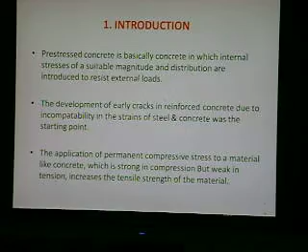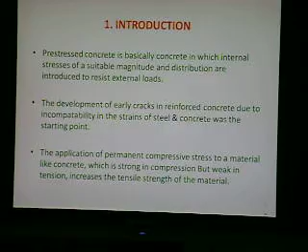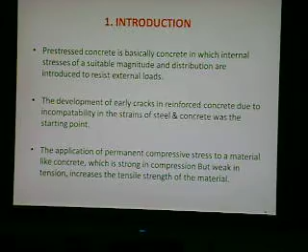Pre-stressed concrete is basically concrete in which internal stresses of a suitable magnitude and distribution are introduced to resist external loads. The development of early cracks in reinforced concrete due to incompatibility in the strains of steel and concrete was the starting point. The application of permanent compressive stress to a material like concrete, which is strong in compression but weak in tension, increases the tensile strength of the material.

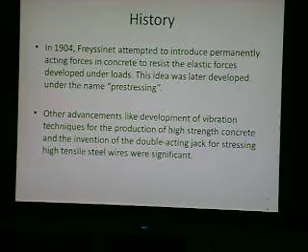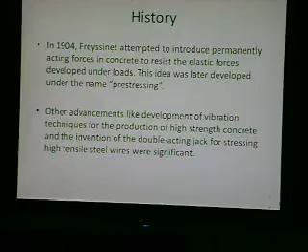In 1904, Freyssinet attempted to introduce permanently acting forces in concrete to resist the elastic forces developed under loads. The idea was later developed under the name pre-stressing. Other advancements like development of vibration techniques for the production of high-strength concrete and the invention of double-acting jack for stressing high-tensile steel wires were significant.

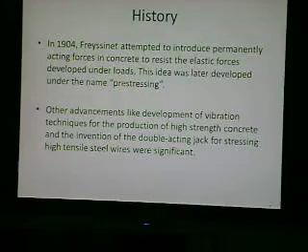Some important terms. Tendons: a stretched element used in a concrete member or structure to impart pre-stress to the concrete. Generally, high tensile steel wires, bars, cables or strands are used as tendons. Anchorage: a device generally used to enable the tendon to impart and maintain pre-stress in the concrete.

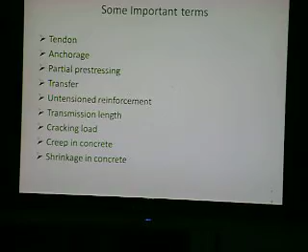Partial pre-stressing: the degree of pre-stress applied to the concrete in which tensile stresses to a limited degree are permitted in concrete under working loads. Transfer: this stage corresponds to the transfer of pre-stress to concrete. For post-tension members, it takes place after the completion of the tensioning process.

Supplementary or untensioned reinforcement is the reinforcement in pre-stressed members not tensioned with respect to the surrounding concrete before the application of loads. These are generally used in partially stressed members.

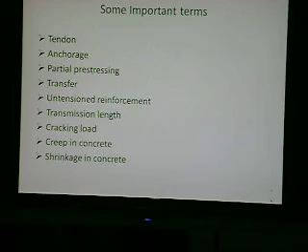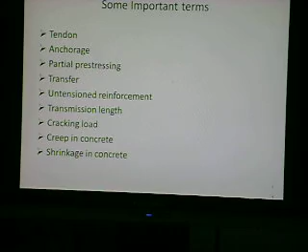Transmission length is the length of bond anchorage of pre-stressing wire from the end of the pre-tensioned member to the point of full steel stress. Cracking load is the load on the structural element corresponding to the first visible crack. Creep in concrete is the progressive increase in the inelastic deformation of concrete under sustained stress component.

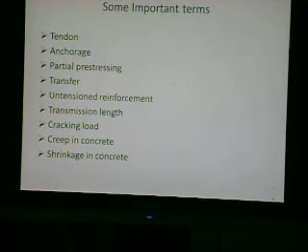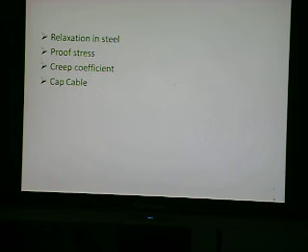Shrinkage of concrete is the contraction of concrete on drying. Relaxation in steel is the decrease of stress in steel at constant strain. Proof stress is the tensile stress in steel which produces a residual strain of 0.2% of the original gauge length on unloading. Creep coefficient is the ratio of total creep strain to elastic strain in concrete.

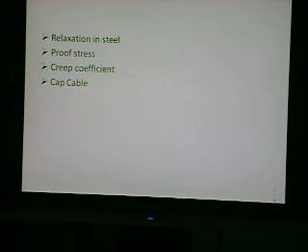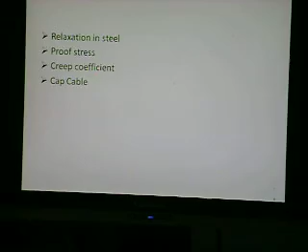Cap cable: a short curved tendon arranged at the interior supports of a continuous beam. The anchors are at the compression zone, and the cable's curved portion is in the tensile zone.

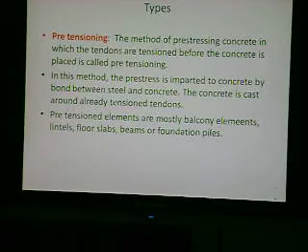Types: Pre-tensioning is the method of pre-stressing concrete in which the tendons are tensioned before the concrete is placed. In this method, the pre-stress is imparted to the concrete by bond between steel and concrete. The concrete is cast around already tensioned tendons. Pre-tensioned elements are mostly balcony elements, lintels, floor slabs, beams or foundation piles.

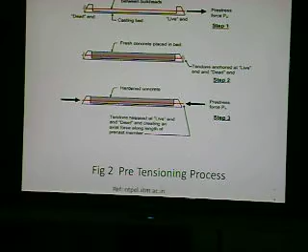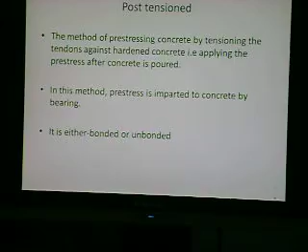Figure shows the pre-tensioning process. Post-tensioning is the method of pre-stressing concrete by tensioning the tendons against hardened concrete, that is, applying the pre-stress after the concrete is poured. In this method, pre-stress is imparted to the concrete by bearing. It is either bonded or unbonded.

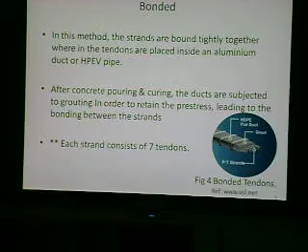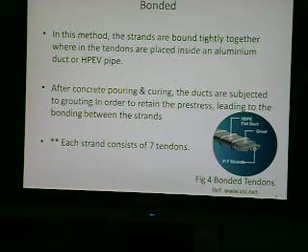Post-tension process. In the bonded method, the strands are bound tightly together wherein the tendons are placed inside an aluminium duct or HPEV pipe. After concrete pouring and curing, the ducts are subjected to grouting in order to retain the pre-stress, leading to bonding between the strands.

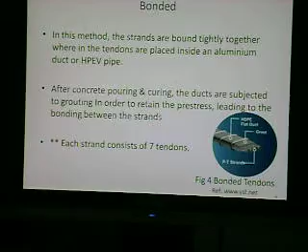Each strand consists of 7 tendons. Advantages of bonded post-tensioning: large reduction in traditional reinforcement, tendons can be easily woven allowing a more efficient design approach, higher ultimate strength due to bond generated between strand and concrete, and no long-term issues with maintaining the integrity of the anchor end.

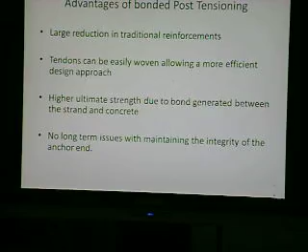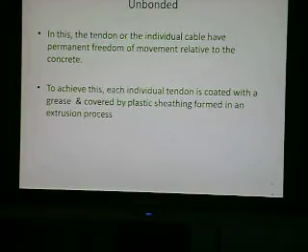Unbonded: in this method, the tendon or individual cable has permanent freedom of movement relative to the concrete. To achieve this, each individual tendon is coated with grease and covered by a plastic sheathing formed in an extrusion process.

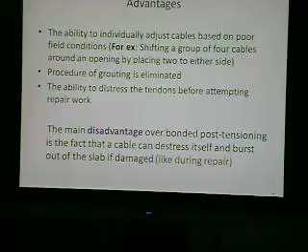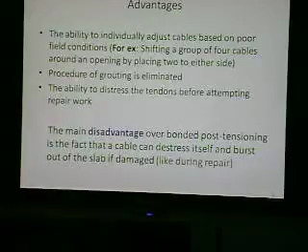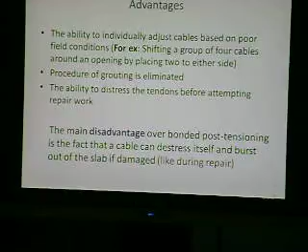Advantages include the ability to individually adjust cables based on field conditions, elimination of the grouting procedure, and the ability to de-stress the tendons before attempting repair work. The main disadvantage over bonded post-tensioning is that a cable can de-stress itself and burst out of the slab if damaged.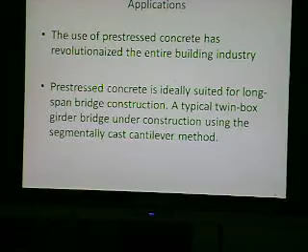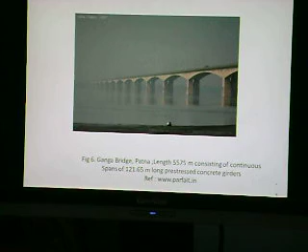Applications: the use of pre-stressed concrete has revolutionized the entire building industry. Pre-stressed concrete is ideally suited for long-span bridge construction, such as a typical twin box girder bridge under construction using the segmentally cast cantilever method. Examples include the CN Tower in Toronto, Canada, and the Ganga Bridge in Patna.

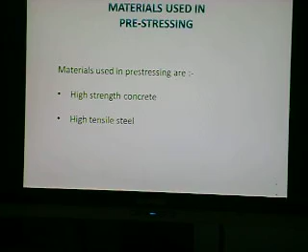Materials used in pre-stressing are high-strength concrete and high-tensile steel. Properties of concrete required include high strength with low water to cement ratio, durability with low permeability, minimum cement content with proper mixing, compaction and curing, and minimum shrinkage and creep by limiting the cement content.

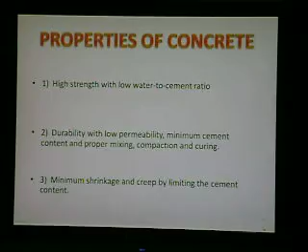To sustain the high stresses at anchorage regions, the concrete needs higher strength in compression, tension, shear and bond, higher stiffness for reduced deflection, and reduced shrinkage cracks.

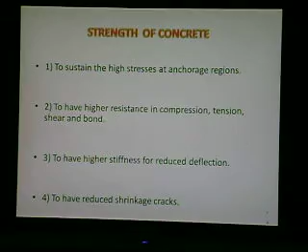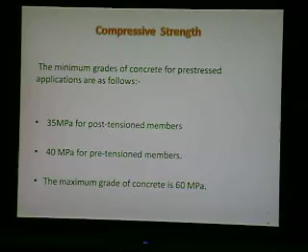Compressive strength: the minimum grades of concrete for pre-stressed applications are 35 megapascals for post-tension members and 40 megapascals for pre-tension members. The maximum grade of concrete is 60 megapascals.

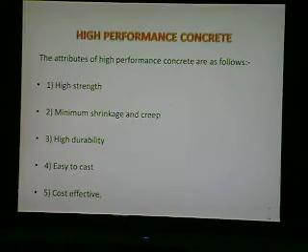High performance concrete attributes include high strength, minimum shrinkage and creep, high durability, easy to cast, and cost effectiveness. Traditionally, high performance concrete implied high strength concrete with higher cement content and low water to cement ratio.

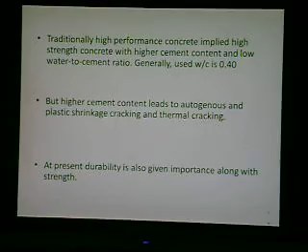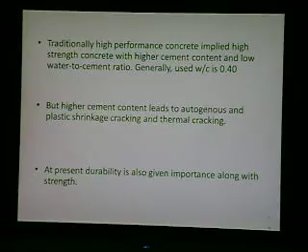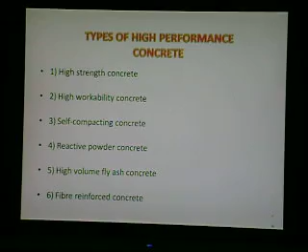But higher cement content leads to autogenous and plastic shrinkage, cracking and thermal cracking. At present, durability is also given importance along with strength. Types of high performance concrete include high strength concrete, high workability concrete, self-compacting concrete, reactive powder concrete, high volume fly ash concrete, and fiber reinforced concrete.

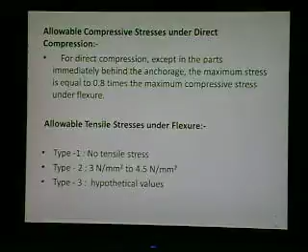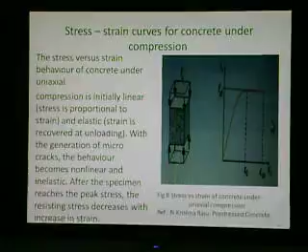Stress strain curve for compression: the stress versus strain behavior of concrete under uniaxial compression is initially linear, and then on generation of micro cracks the behavior becomes non-linear and inelastic. After the specimen reaches peak stress, the resisting stress decreases with increase in strain.

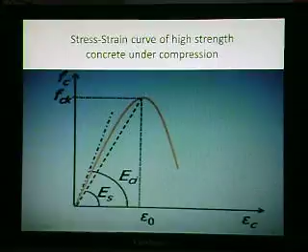Stress strain curve of high strength concrete under compression. Stress strain curve for concrete under...